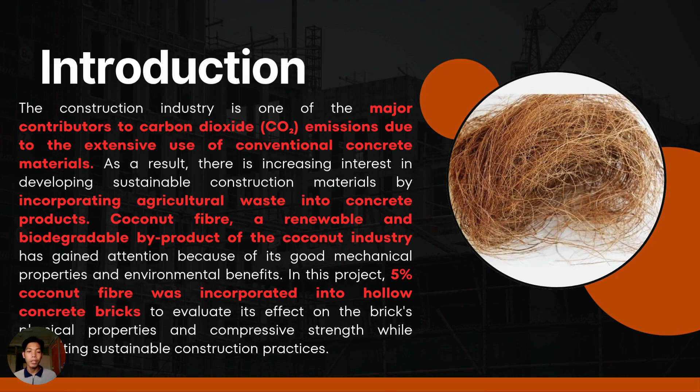In this project, 5% coconut fiber was incorporated into hollow concrete bricks to evaluate its effect on the brick's physical properties and compressive strength while promoting sustainable construction practice. And in our research, our objective is to produce sustainable hollow concrete bricks by using coconut fiber. Second, to evaluate the physical properties of the fabricated bricks. Third, to determine the compressive strength of the bricks. And finally, to promote sustainable construction practice.

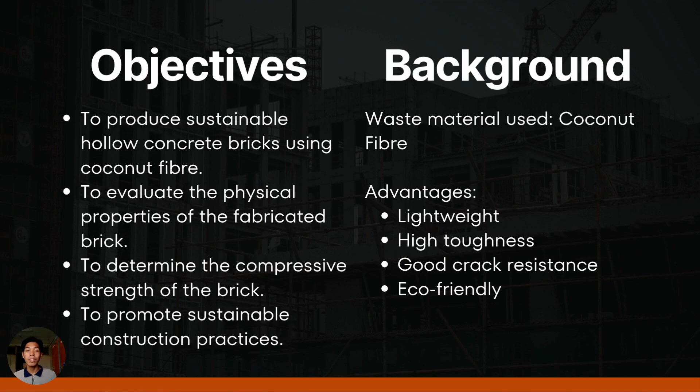And as I said before, our group decided to use coconut fiber because of its advantages. So the advantage of the coconut fiber is first, coconut fiber is a lightweight material, which helps us to produce light concrete bricks. Second, coconut fiber is a high toughness material. Third, it has a good crack resistance that can help us to produce high tensile load resistant concrete bricks. And finally, of course, coconut fiber is an eco-friendly material because it comes from a natural resource.

Okay, thank you, Anik, for the introduction. So next, we move to methodology. So our main goal is to test how concrete bricks perform when we replace 10% of gravel with the processed coconut fiber. To keep the test fair, all the bricks will have the exact same size even though we are using the agriculture waste. We want this brick to be strong, targeting grade 30 or 30 megapascals strength standard.

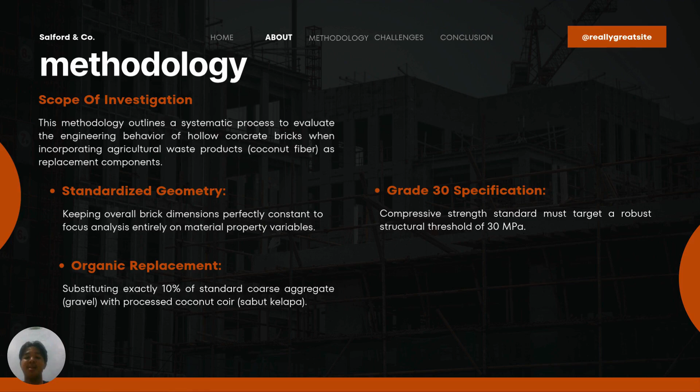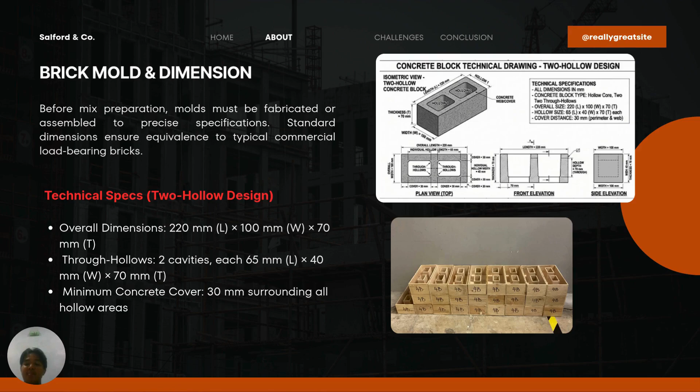Next, we move to brick design. So let's look at the design. Before the mixing, we prepare the precise mold that matches standard commercial brick. We are using two hollow design. The brick size is 220 mm long, 100 mm width, and 70 mm thick. It has two hollow cavities inside, and we ensure there is at least a 30 mm concrete layer around the hollow to keep the structure safe.

Next, we move to volume calculation. To know how much material, we did some simple math. First, the gross volume of the hollow brick is 0.00154 meter cubic. Next, hollow volume for the two cavities is 0.000364 meter cubic. By subtracting the hole from the total size, we get the net concrete volume, which is 0.001176 meter cubic. This tells us the exact amount of concrete we need for our brick.

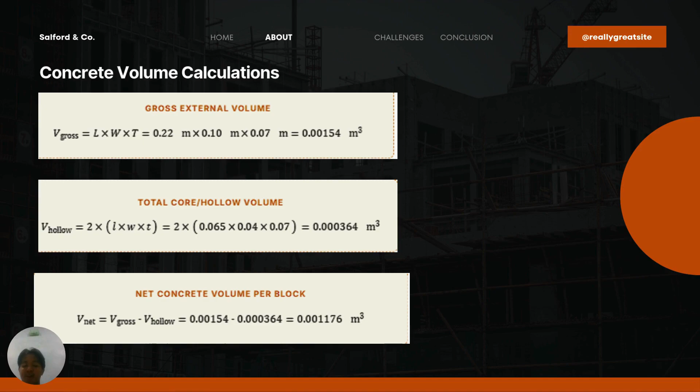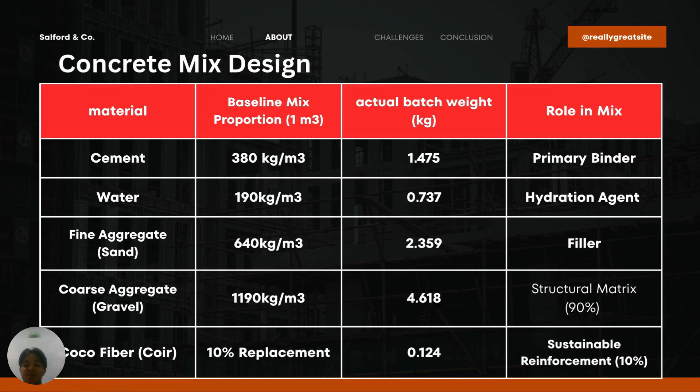Next, we move to mix design. Based on the volume, here is our recipe for one single brick: 1.475 kg of cement to bind everything, 0.737 kg of water for the chemical reaction, 2.359 kg of sand as a filler, 4.618 kg of gravel for the main strength, and finally 0.124 kg of coconut fiber as our 10% green replacement.

Next, we move to material preparation. Before mixing, material preparation is key. For the coconut fiber, we wash it thoroughly, dry it completely in an oven or under the sun so it doesn't affect our water ratio, and then chop it uniformly. For the aggregate, the sand and gravel are sieved and kept dry before we weigh them precisely using the digital scale.

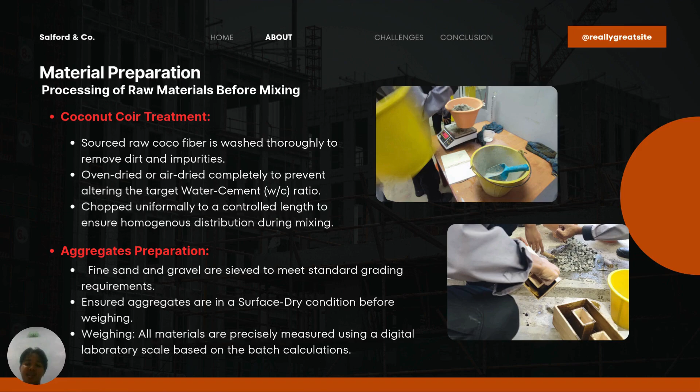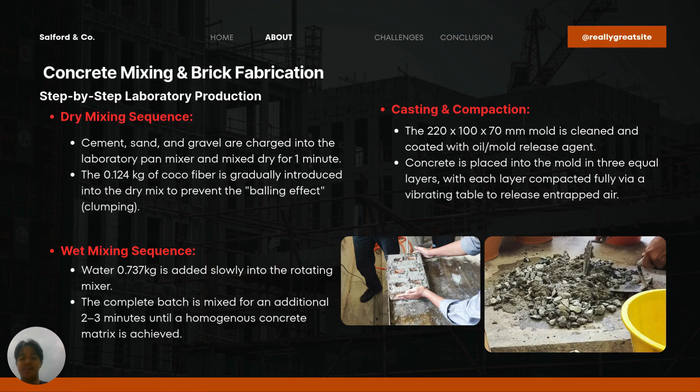And finally, curing and testing. We let the bricks set for 24 hours before taking them out of the mold. Then we submerge them in the water for 7 days for the curing process. After 7 days, we do two tests. Physical test, which checks the final look, size and weight, and mechanical test. We crush the brick vertically and horizontally to test their strength and see how they hit our 30 megapascal target.

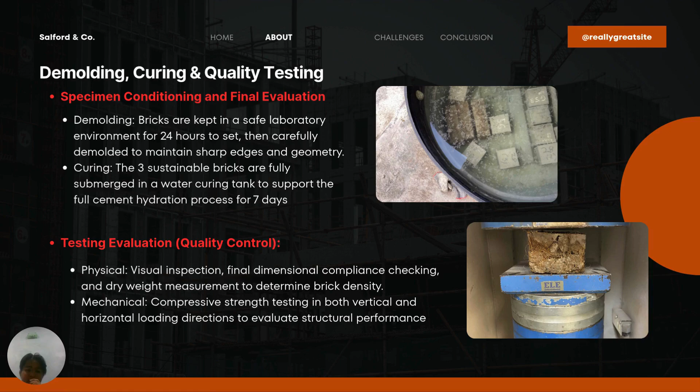So we move to the next slide. Okay, thank you.

For our concrete mix design, coconut fiber was utilized as the aggregate replacement material. The chosen replacement percentage was 5%. The casting took place on the 24th of June 2026 and the curing process commenced on the 25th of June 2026. The mix consisted of 1.475 kg of cement, 2.359 kg of sand, and 4.618 kg of gravel. Additionally, it contained 0.737 kg of water and 0.124 kg of coconut fiber.

Our goal was to evaluate the feasibility of incorporating agricultural waste into concrete. During preparation, the fibers dispersed evenly throughout the mixture. The mix became slightly less workable because the porous fiber absorbed some of the water. However, with proper compaction, we successfully produced hollow bricks with an excellent finish and no fiber segregation.

After a 7-day curing period, the brick's weight decreased from 2.440 kg to 2.270 kg. This 7% reduction occurred mainly due to water evaporation and the lower density of the coconut fiber. This lighter weight offers advantages like easier handling and lower dead load.

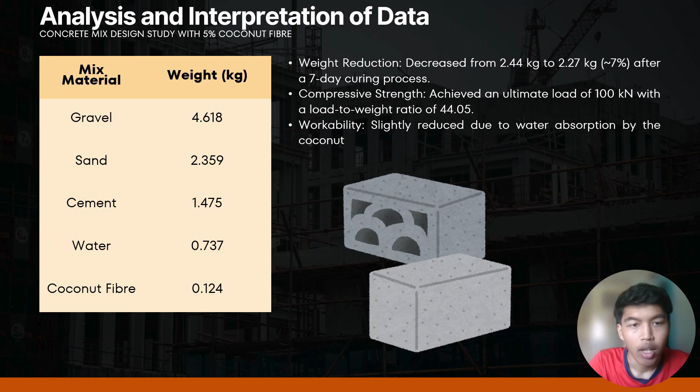During testing, the brick withstood an ultimate compressive load of 100 kN. The fibers significantly improved the concrete toughness because they bridge small cracks and delay crack propagation. Ultimately, the 5% replacement proved highly effective in creating a strong, lightweight, and sustainable construction material.

The study evaluated the incorporation of 5% coconut fiber into hollow concrete brick. These results show a weight reduction of approximately 7% after a 7-day curing period. This reduction resulted from water evaporation and the naturally lower density of the coconut fibers. Despite its lighter weight, the brick successfully achieved an ultimate compressive load of 100 kilonewton.

The incorporated fibers act as micro-reinforcement which bridge small cracks and delay crack propagation. Furthermore, the fabricated brick met the specified dimensions flawlessly. This finding suggested that the brick possessed adequate strength for lightweight or non-load-bearing construction.

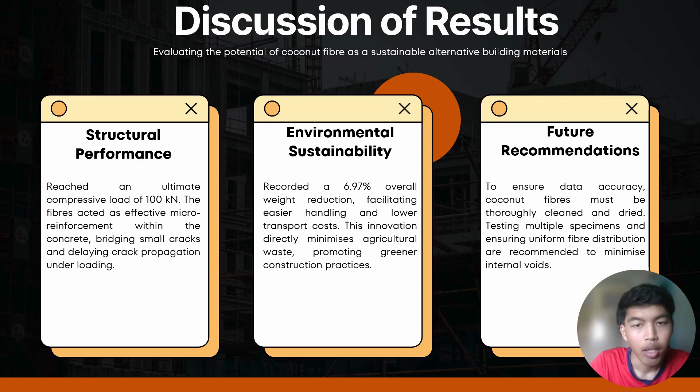However, certain factors like non-uniform fiber distribution and testing only a single specimen might have influenced the final result. To improve future consistency, we recommended washing and drying the fibers thoroughly, ensuring proper compaction and testing multiple specimens.

Thank you, Ali. So I'm going to the conclusion. The objective of this study was to investigate the suitability of 5% coconut fiber as a sustainable material in hollow concrete brick production. Based on the experimental results, the coconut fiber was successfully incorporated into the concrete mix, producing a lightweight brick with an ultimate compressive load of 100 kilonewton.

Therefore, the objective of the experiment was successfully achieved, demonstrating that coconut fiber can be used as an environmentally friendly alternative material for hollow concrete brick. This result indicates a 6.97% reduction in weight after 7 days of curing due to moisture loss. No theoretical or control value was provided for comparison.

For future work, it is recommended to investigate different coconut fiber replacement percentages and extend the curing period to 28 days to obtain the standard compressive strength, to provide a more comprehensive evaluation of coconut fiber hollow concrete brick. This improvement will provide a clearer understanding of the material's long-term performance and suitability for practical construction application.